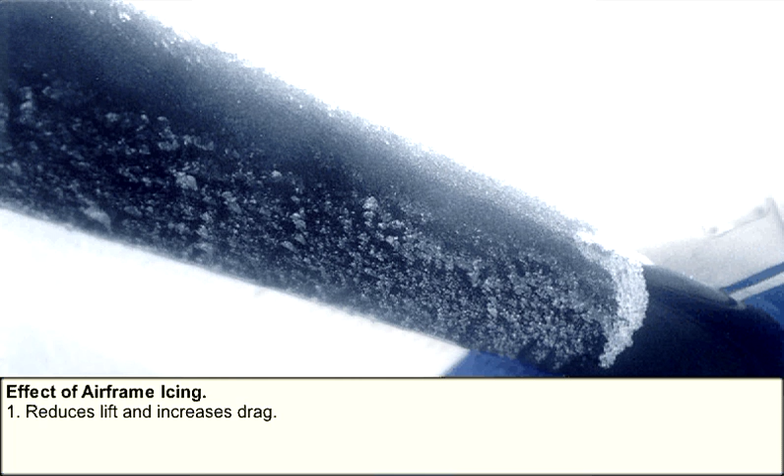Another performance factor to consider is weight. Significant ice accretion can increase the weight of the aircraft. To oppose this extra weight, we need to increase lift. And as we've just stated, ice on the airframe will have the effect of reducing lift. The combination of these effects increases the stall speed of an aircraft and reduces its stability. In flight, this spells danger.

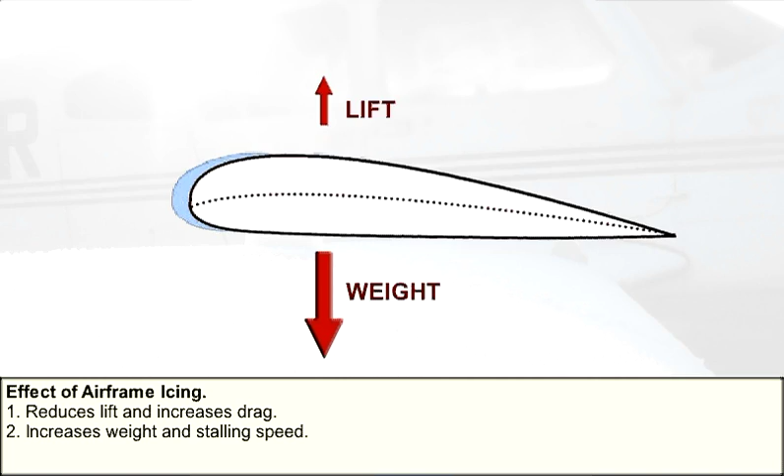Icing also has adverse effects on aircraft instruments. It can block vents and ports, and so, in icing conditions, be wary of instruments which rely on these vents and ports for accurate readings.

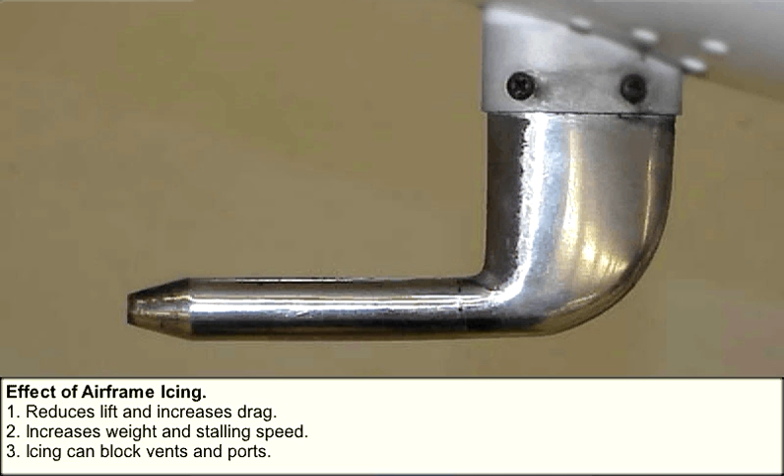Aircraft icing occurs because of the presence of supercooled water droplets inside clouds. These exist as large or small droplets, or both, depending on the outside air temperature and the type of cloud in which they are found.

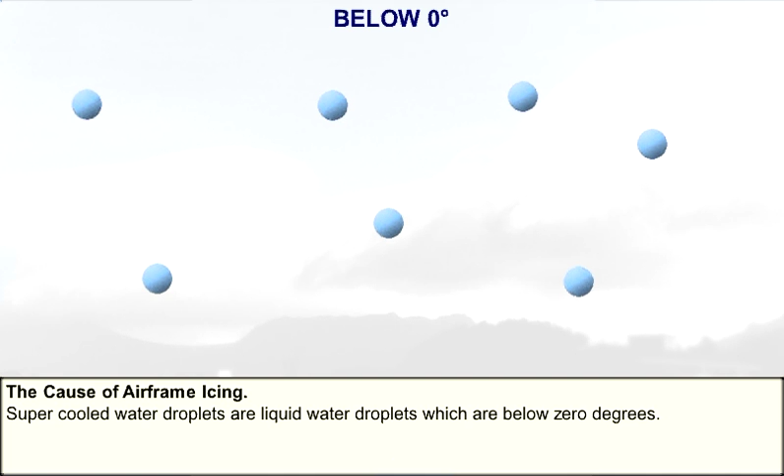Supercooled water droplets are water droplets which are still in a liquid state, even though the temperature is below 0 degrees Celsius. This situation prevails only when there is nothing for the droplets to freeze onto, that is, when there are no freezing nuclei. Supercooled water droplets can exist in the atmosphere at temperatures as low as minus 40 degrees Celsius.

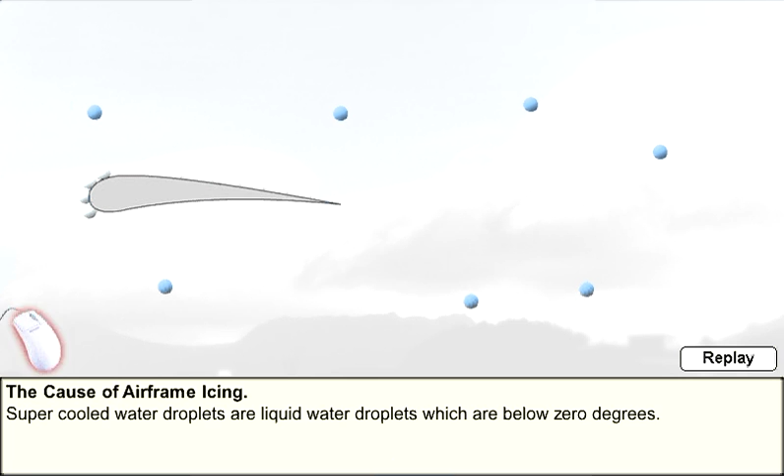As you can imagine, there is one surface which, when presented to the supercooled water droplets, will cause them to freeze. This is, of course, an aircraft. The type of airframe icing depends on the size of the droplets present within the cloud.

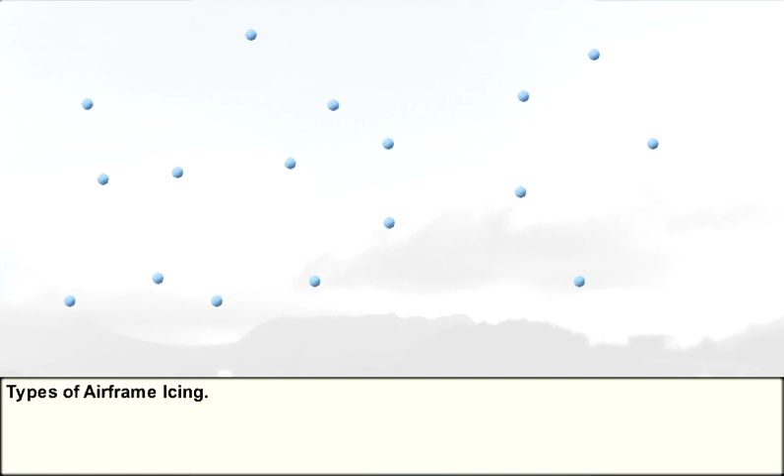Let's examine the small supercooled water droplets first. These can be found at temperatures between minus 15 degrees Celsius to minus 40 degrees Celsius. Since they are so small, the moment they come into contact with the leading edges of an aircraft, they will freeze instantly. As the diagram shows, over time the ice will accumulate on the leading surfaces of the aircraft.

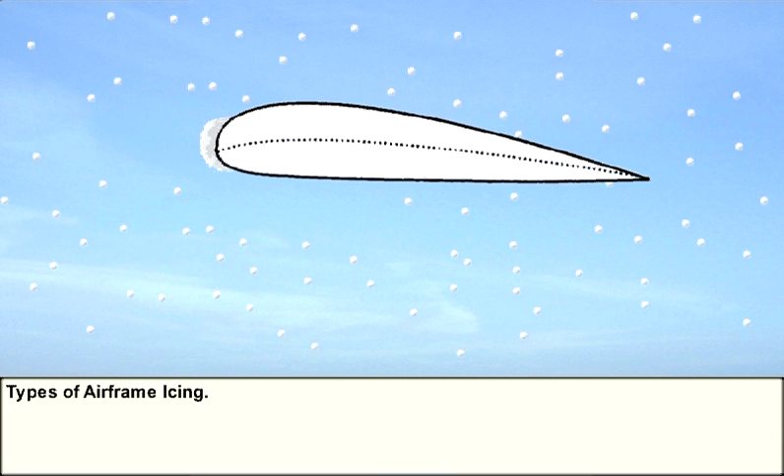This type of icing is known as rime ice. It's characterized not only by the way it builds just on the tip of the leading edges, but also by its color and texture. It's opaque or milky in appearance. This is because air is trapped inside the ice because the freezing process occurs so rapidly. It also has a rough sandpaper-like texture. This is because small droplets freeze straight away and accumulate to give a granular growth. It looks and feels very much like the ice that grows on the inside of domestic freezers.

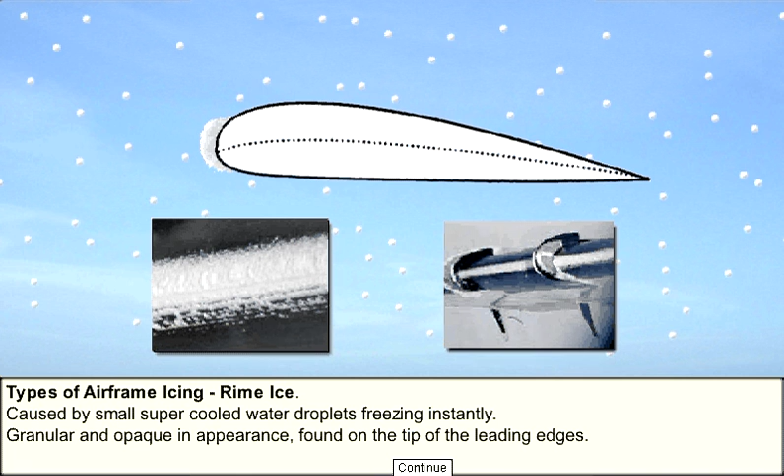The large supercooled water droplets are found at temperatures between 0 degrees Celsius and minus 15 degrees Celsius, and they freeze in a very different way. Because of their size, they don't freeze straight away. When the droplet first strikes the leading edges of the aircraft, only that part touching the aircraft will freeze instantaneously. The remainder of the droplet can then flow backwards, slowly freezing as it comes into contact with the skin surface. This buildup is characteristic of this type of icing called clear or glazed ice.

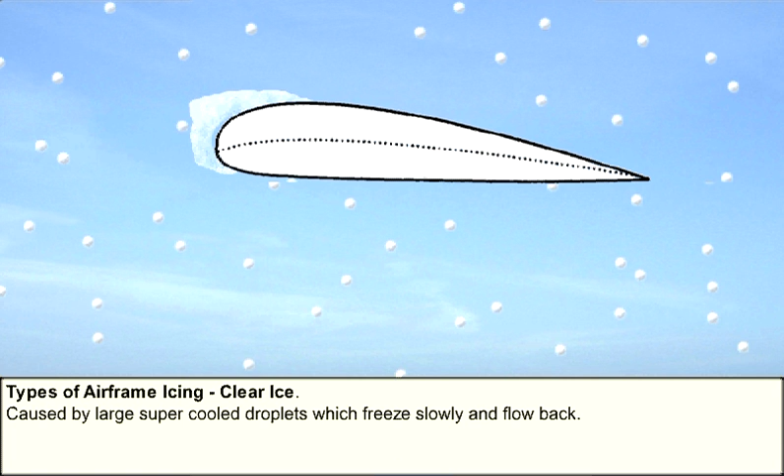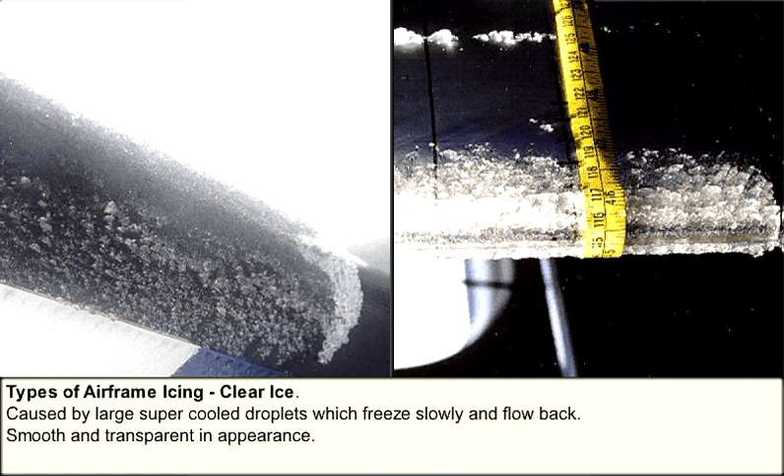Clear ice looks like glass and is mostly transparent, making it difficult to spot. It's clear because there is no air trapped inside. The freezing process is slow enough to allow the air to escape. This icing is very dangerous. It can rapidly accumulate on the wings and is more difficult to remove.

On most occasions, though, it's unlikely that you will experience just one type of icing. It's far more likely you'll experience both forms. This type of icing is called mixed ice and incorporates both rime and clear ice characteristics.

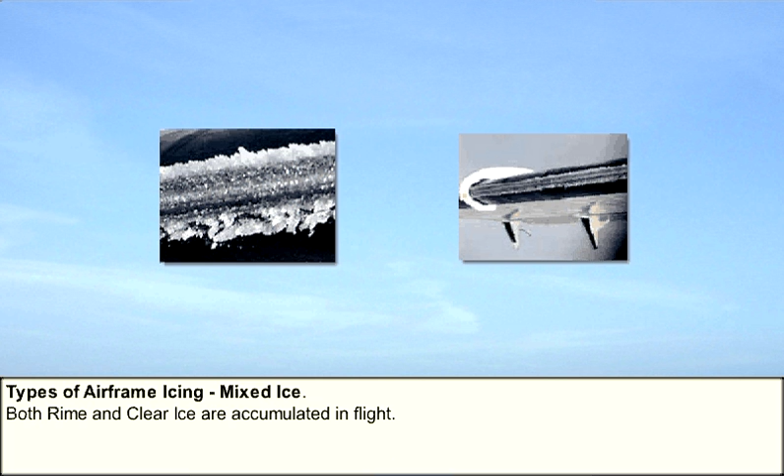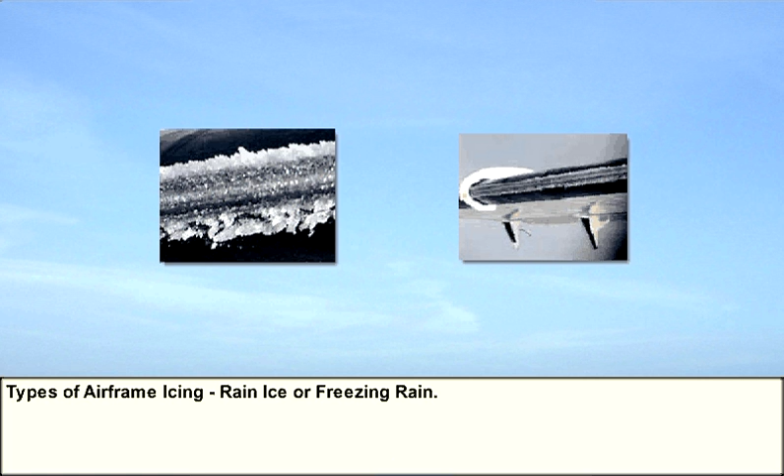There's a third type of icing called rain ice or freezing rain. This type of icing is the most hazardous to aircraft operations. In order for it to form, warm air must overlie very cold air, which is below 0 degrees. This is only possible on a warm front, like the one shown here, or an occluded front. The cloud and rain is being produced inside the warm air as it rises up and along the front. But notice that at this point, the rain is falling into air below 0 degrees, and it may become supercooled.

If an aircraft were to be flying in this area, the rate of accumulation of ice is so severe that within a very short time, the aircraft will not be able to sustain flight, making diversion a necessity. Be cautious when flying through warm fronts or occlusions, especially if the air ahead of the front is very cold. If you start to encounter freezing rain, turn away and leave the area immediately.

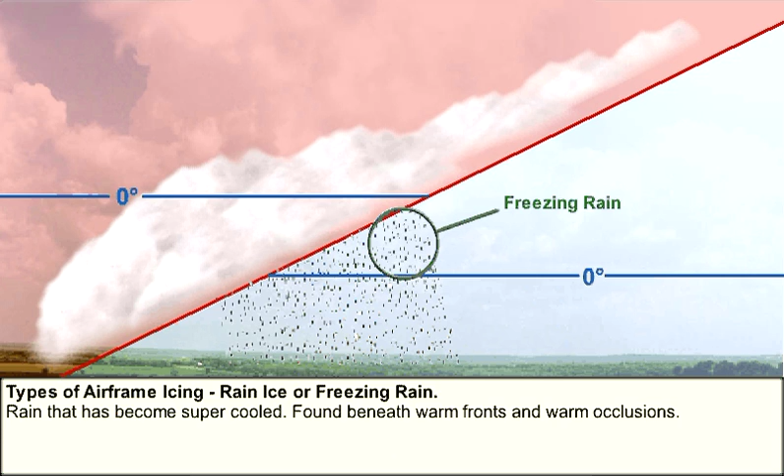There is one more type of icing. This is called hoarfrost, and it's the only icing that can develop clear of cloud. This icing is identical to that which can develop on car windscreens on frosty nights. It can develop on an aircraft in flight or on the ground.

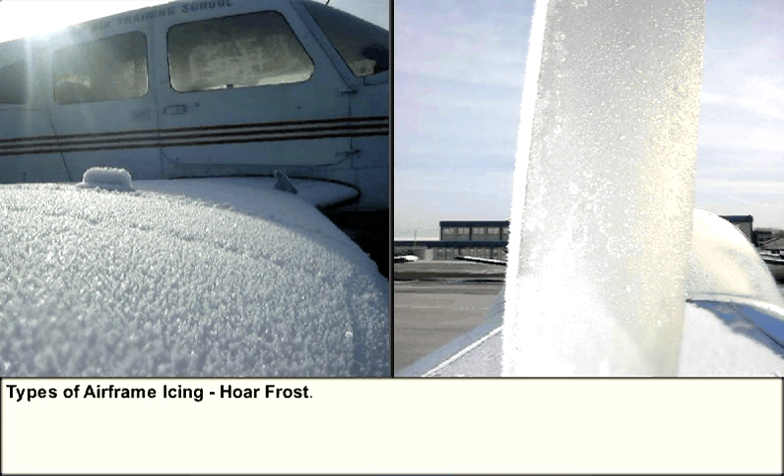On the ground on clear nights, when the surface temperature falls below 0, water vapour can turn directly to ice, and hoarfrost can be seen on the surface as the ice crystals are created. It's important that prior to flight this ice be removed, since it can interfere with the airflow over the aircraft.

This kind of icing can occur in flight in clear air when an aircraft rapidly climbs through an inversion. If the initial air temperature is below 0, then the skin of the aircraft will also be below 0 degrees. But when it climbs and enters the warmer air, the air travelling over the skin is cooled, and sublimation can occur, creating ice crystals and frost.

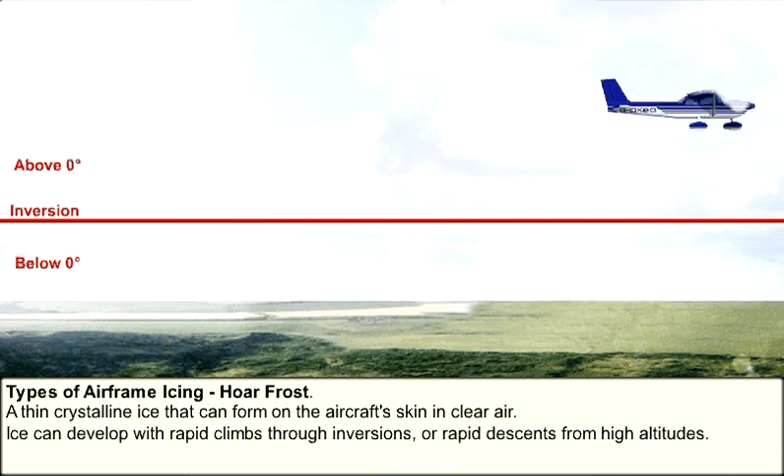This can also be observed in a rapid descent from high altitude where the aircraft's skin temperature is still below 0. As the lower, warmer air flows over the skin, it again can be cooled to freezing point. If your windshield is suffering from this icing, then the danger is that you will not be able to maintain visual reference with the ground.

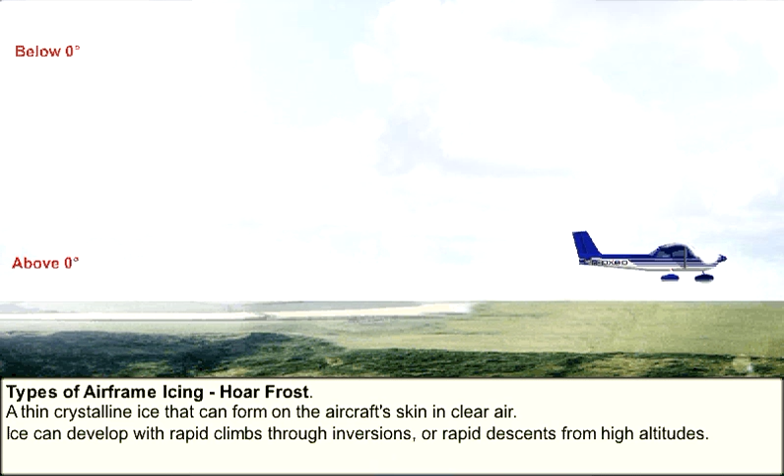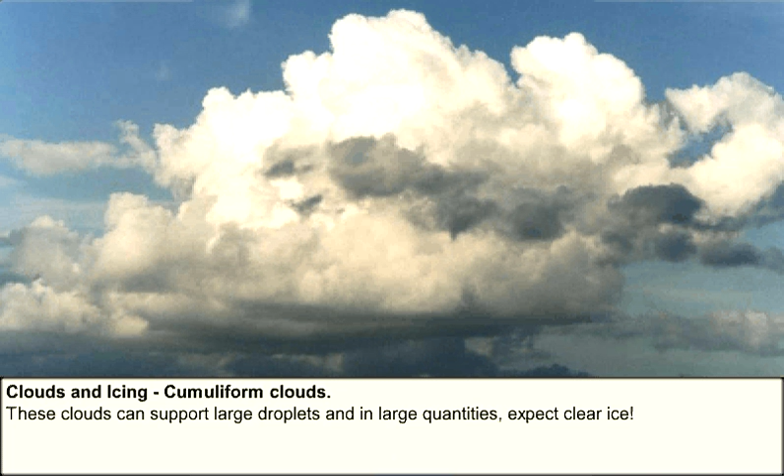We mentioned earlier that both the outside air temperature and the cloud type determine the size of the supercooled water droplets. Cumuliform type clouds frequently have strong vertical updrafts of air moving within them. They can therefore support significant numbers of large, supercooled water droplets.

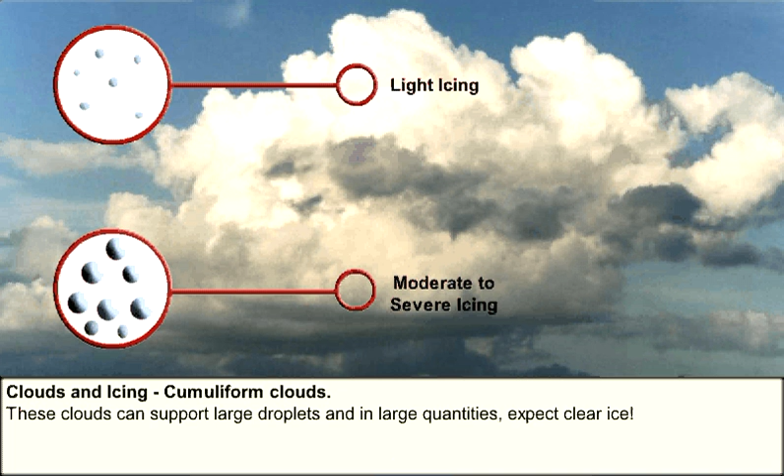As a result, a pilot can expect moderate or even severe clear ice within these clouds, especially in flight to just above the 0 degrees Celsius level. In cumulonimbus clouds, the updrafts are even greater, and so the icing risk is always severe. Avoid these clouds, not just because of the icing risk, but because of the other dangers posed by them.

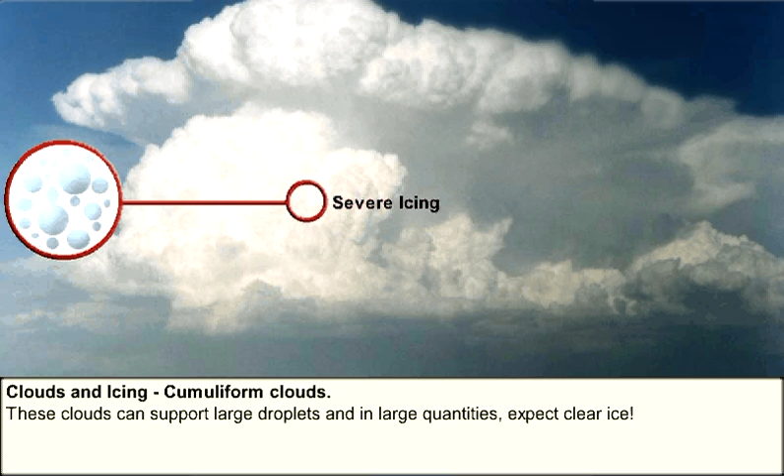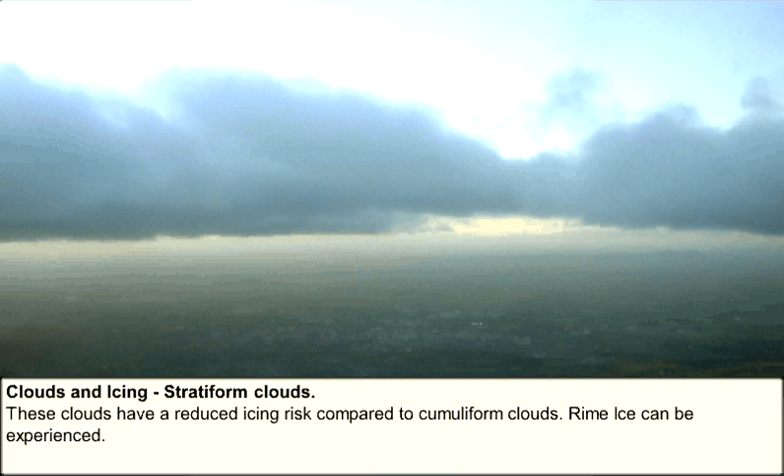In layered cloud, the icing risk is usually much lower because of the lack of vertical air development. Even if the temperatures were suitable for the formation of large supercooled water droplets, the cloud has little capability to support them, and even less capability of supporting large quantities of them. As a result, we can generally expect only small droplets, and therefore only light rime ice.

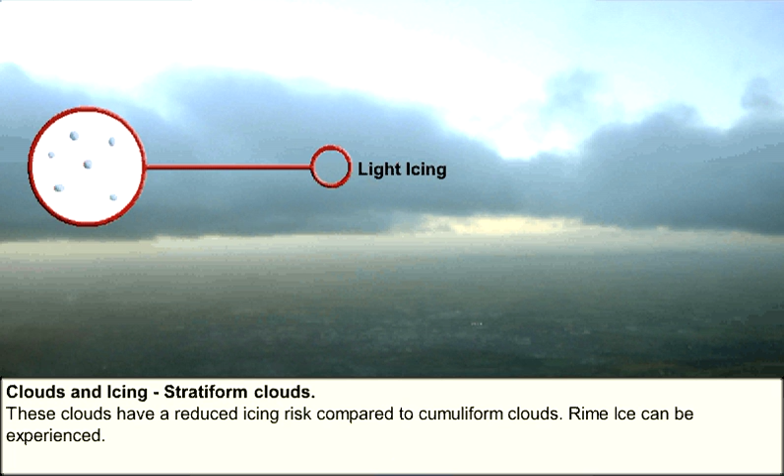The cloud which is an exception to this is nimbostratus. It can have the upcurrents to support the large droplets, making the icing risk moderate or even severe.

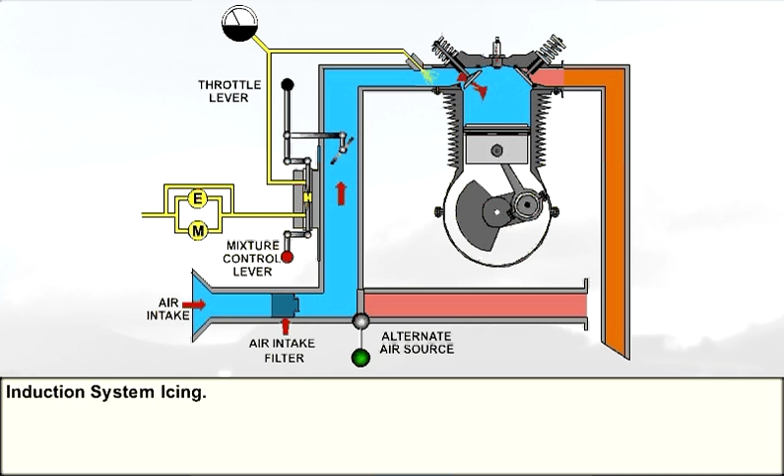The first of this type of ice is called impact ice. This occurs as snow or supercooled water droplets sticking or freezing instantaneously when they come into contact with the walls of the intake chamber and air filter. It can eventually block the air intake completely, causing the engine to stop.

Any type of piston engine can suffer from this type of ice buildup. Fuel-injected aircraft have an alternate air supply to feed the engine when the normal air intakes are blocked.

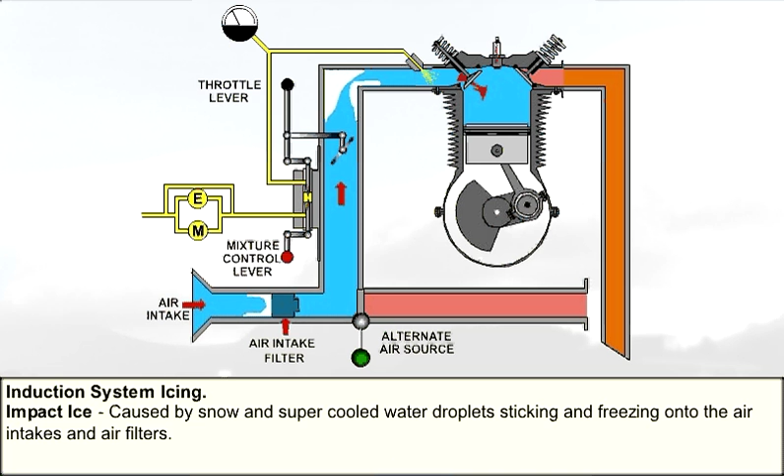When the relative humidity is higher than 50% and the temperature lies between about -10 degrees Celsius to +30 degrees Celsius, another type of ice, called carburetor ice, can build up within the induction system.

This can be caused in two ways. As air passes through the venturi, static pressure decreases and the temperature of the air will fall, possibly causing ice to form within the venturi.

The throttle butterfly valve has a similar effect. On low power settings, the butterfly valve is almost closed and restricts the airflow. This acts like the venturi, and a drop in temperature can occur, causing ice to build up and possibly jam the throttle.

The effect of the vaporization or evaporation of fuel as it leaves the fuel jet, shown here, may combine with this to aggravate the situation. This process causes latent heat to be absorbed and thereby reduces the temperature, possibly leading to ice formation.

The combined effect of these icing processes will cause a piston engine to be starved of air, causing it to run rough and possibly stop.

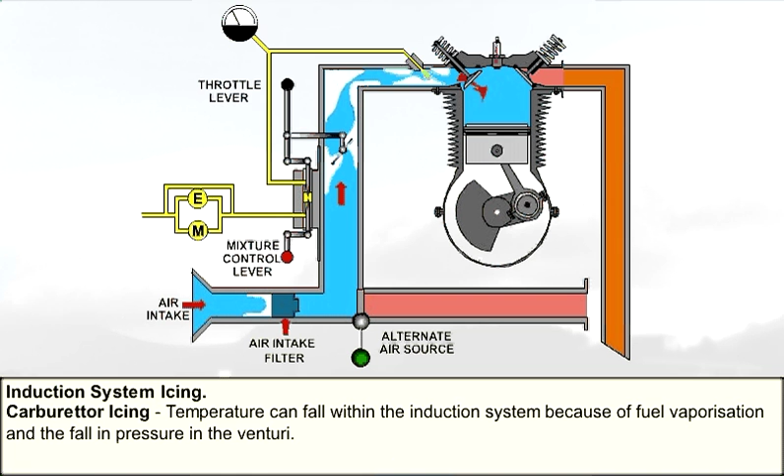However, there is a way to combat this potentially dangerous situation. By selecting carb heat, we can divert warm air from around the engine compartment into the induction system to help melt the ice and prevent starvation of the engine.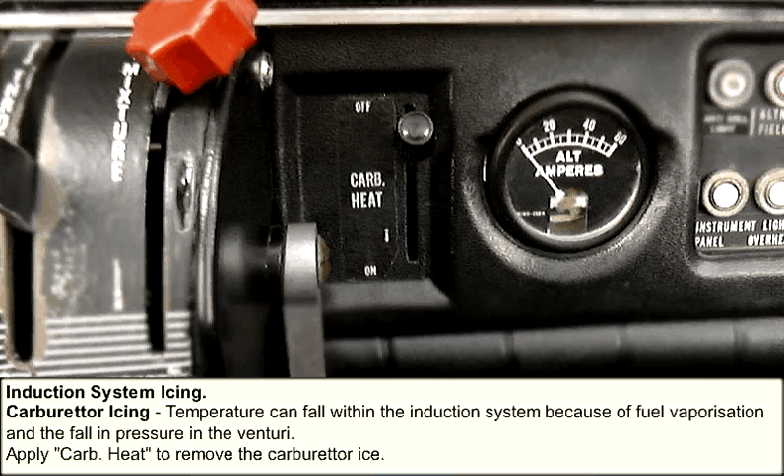However, as hot air passes through the engine, performance will initially deteriorate further because of its reduced density. This may appear rather alarming, but don't worry. This is a sign that the hot air is doing its job.

Similarly, ice and liquid water which may pass through the engine may again cause it to run rough. But as before, this is a sign that it's working. After a few moments, the engine will start to operate normally again.

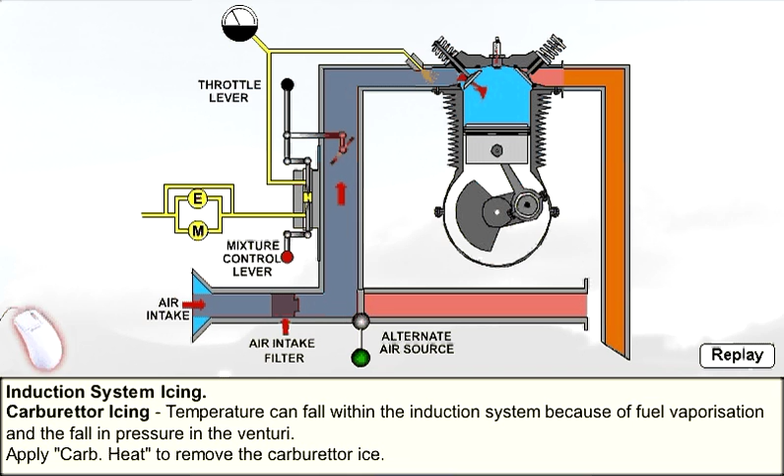This completes the lesson on icing. We've dealt with some very important issues that a pilot must be aware of. Icing is dangerous. Being an informed and educated pilot is the best way to counter that danger.

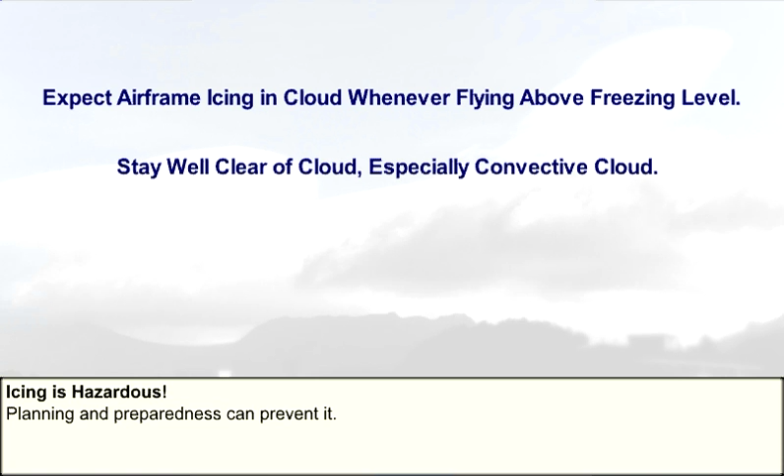Above all, expect airframe icing in cloud whenever flying above the freezing level. At the private pilot level, you should stay well clear of any cloud, especially convective clouds. Lastly, when on low power setting in the descent, for instance, especially when the humidity is high, always be prepared for a rough-running engine caused by carb icing.

Remember that the application of carb heat may momentarily cause the situation to worsen. Keep the carb heat applied and the engine performance will improve.

We may define an air mass as a large